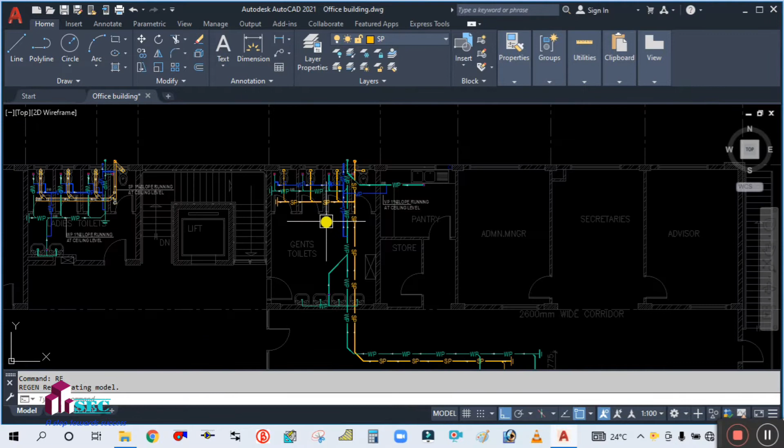Let's continue with our shop drawing for the soil piping. First floor ladies toilet was covered in our previous tutorial, so this is the final one for the gents toilet, first floor.

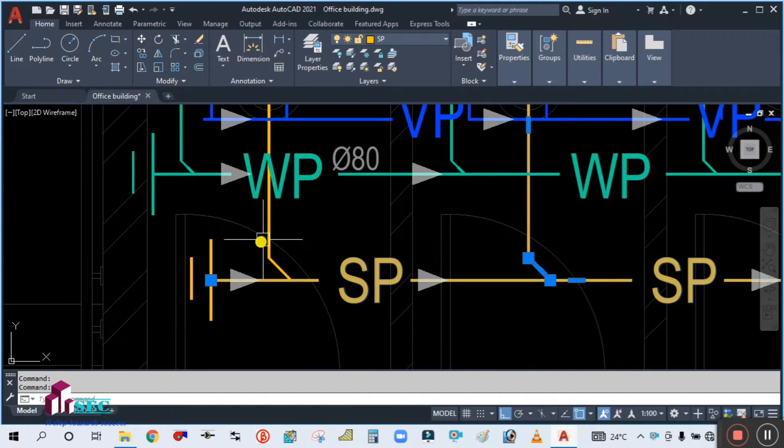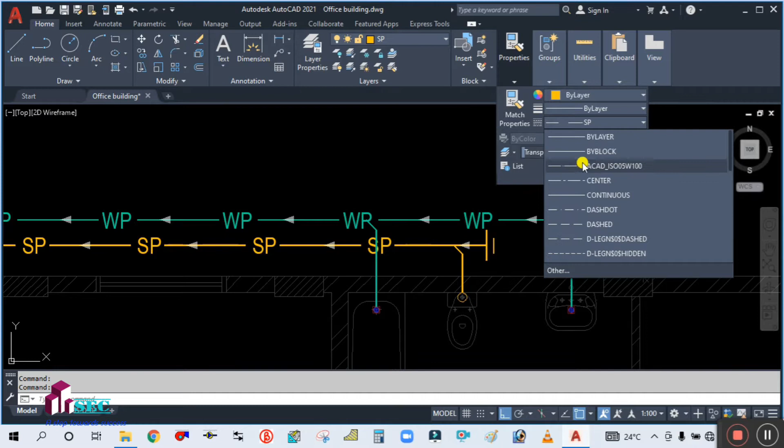Simply select all the polylines, select this one. Now change the line type style first. Go to this property and select line type style to by layer. Now simply select and explode it.

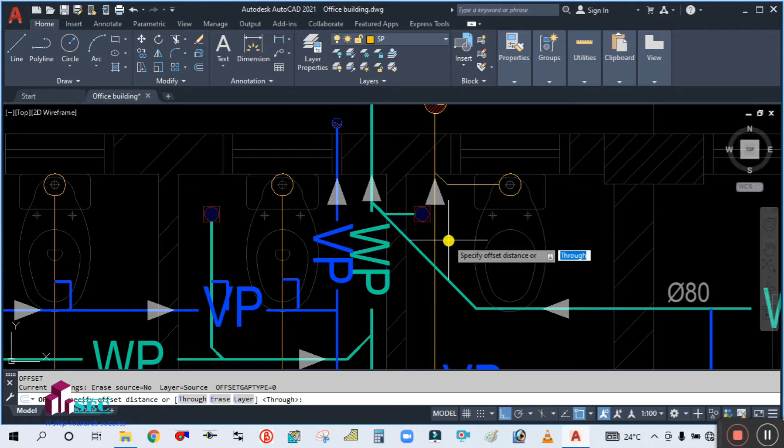Please select and explode. Now simply offset this. The offset is 110 divided by 2. Simply select, press this side, select, press this side.

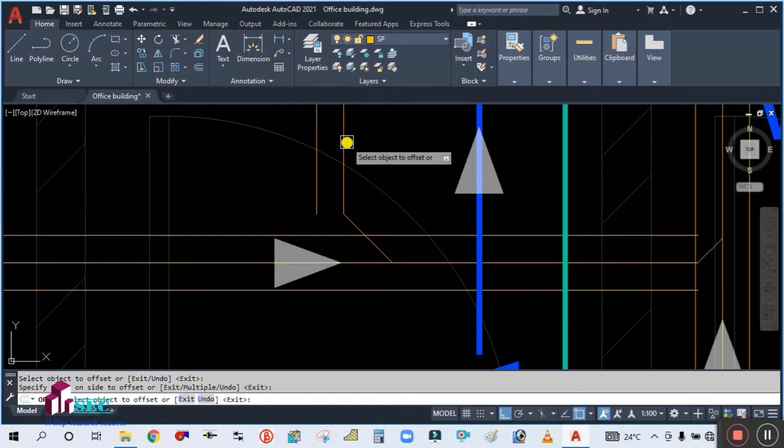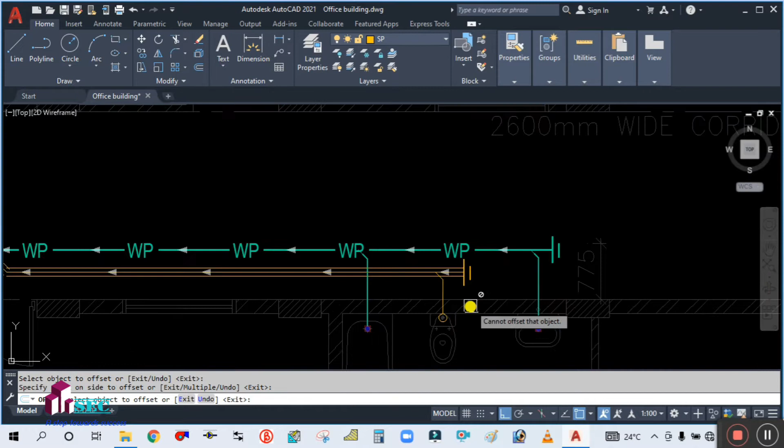Simply offset this one, it's very easy. You need to offset only, after that you have to fix the fitting. So I'm going to offset only, and here can offset like this. Okay, it's over.

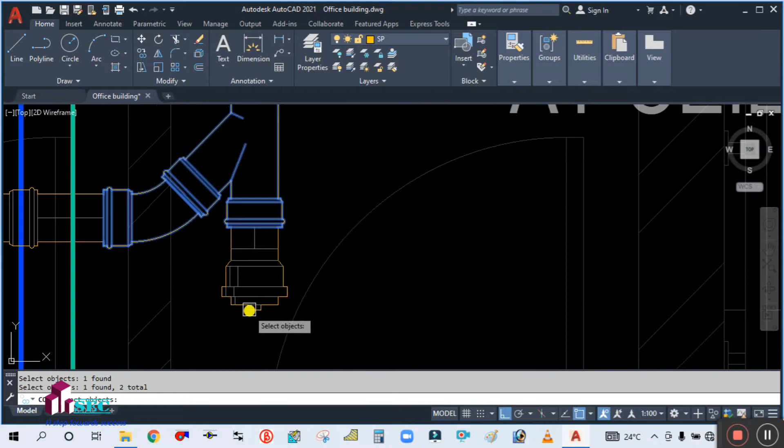Now we are going to copy these fittings. Simply select these fittings from here, select the end cap also, select from the center, and place it here. There you go. Now simply move this one, select this, move from the center.

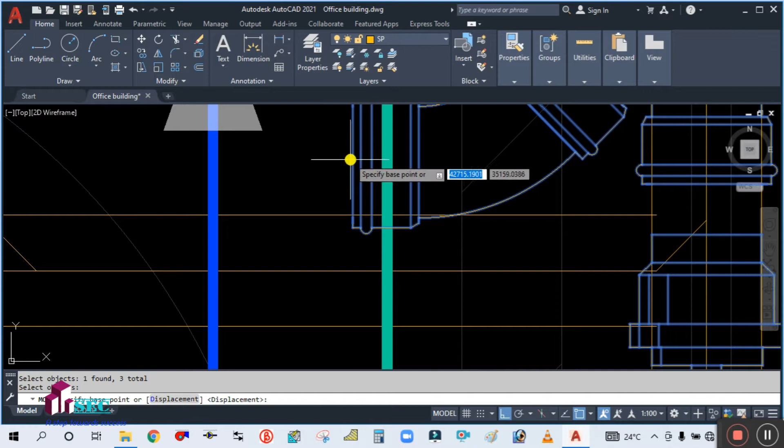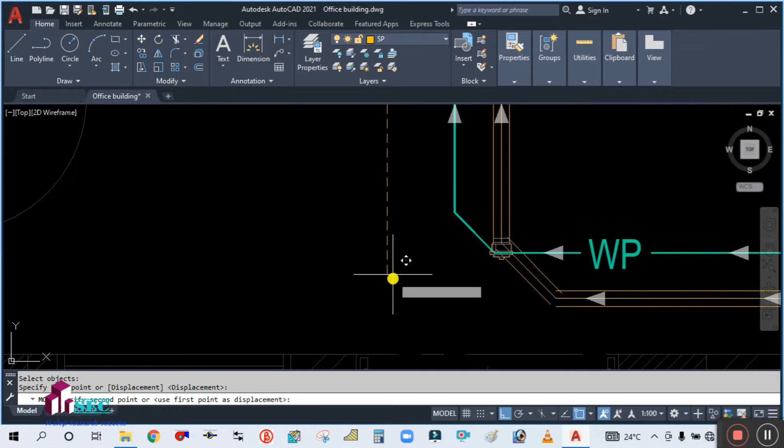Move it down. Now what you will do, this end cap needs to be moved down because this end cap is going to be used here. Now we have to trim the extra line.

So TR, select the edge, cutting edge, then enter, and simply erase this extra line.

Now we have to use the match command. So simply type MA and select this one. Type MA, select the source object and select this destination, just matching this access.

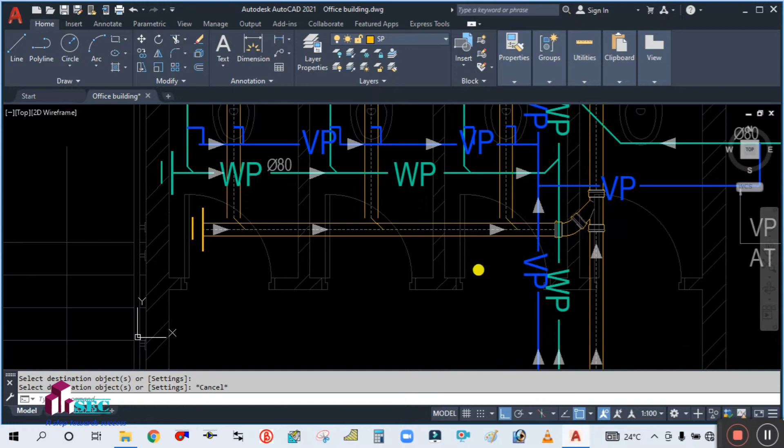Now from here you need to copy this one. Simply copy these fittings, copy from the center line, and paste it here. There you go.

Now simply move this one down. These two fittings need to be moved. Simply select this point, center of this branch, and move it down.

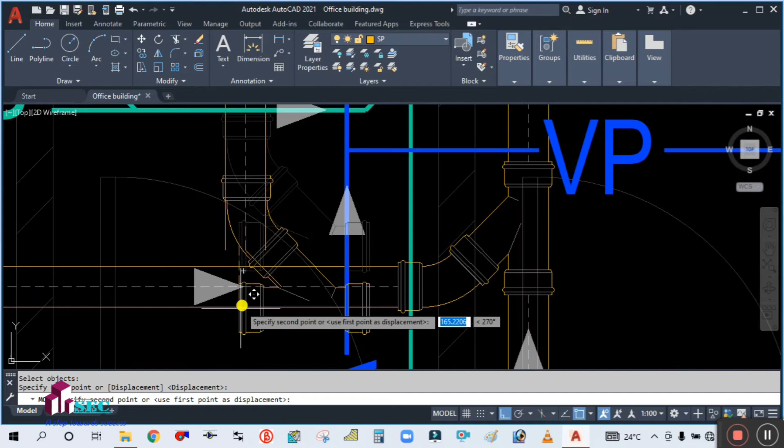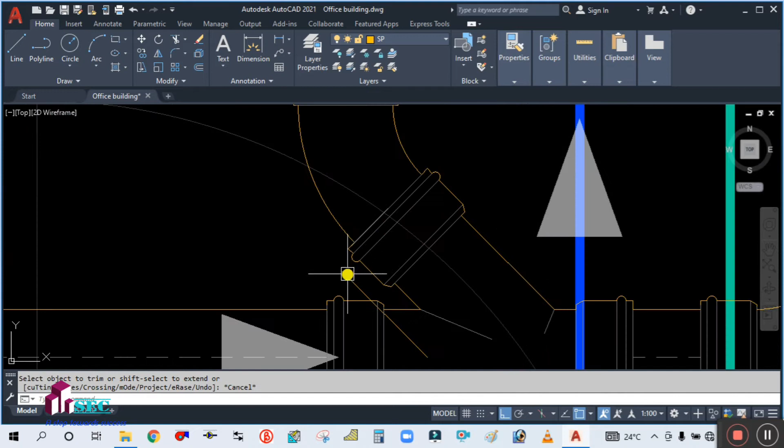Very good. Now TR, simply trim the extra line. So TR, cutting edge, this cutting edge and this cutting edge. Trim this one and trim this one. Simply select this extra line and it needs to be erased. There you go.

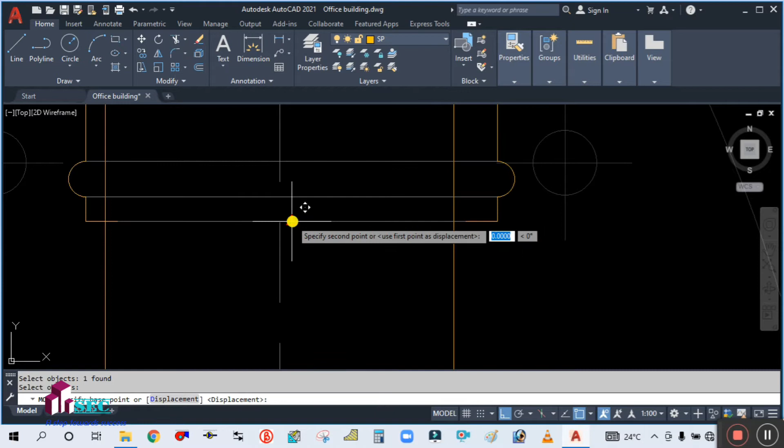Now what you will do, you need to move this little bit to this side because it's not perfectly at center. So move this one. Now trim the extra line, so TR, enter, and erase.

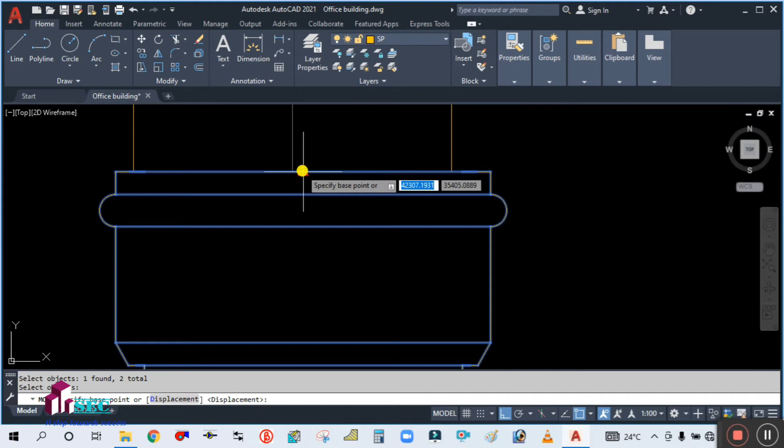So these also need to be moved a little bit, so simply select this one and move from here to here. There you go. Now simply extend this, it needs to be extended, and also this one needs to be extended. Now TR, double enter, trim the extra line.

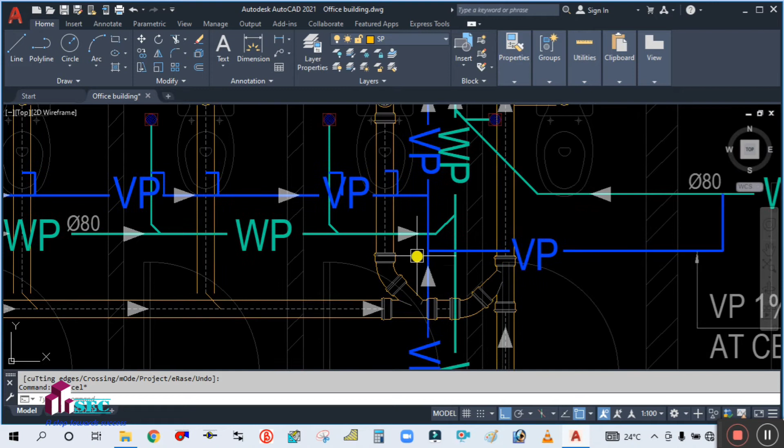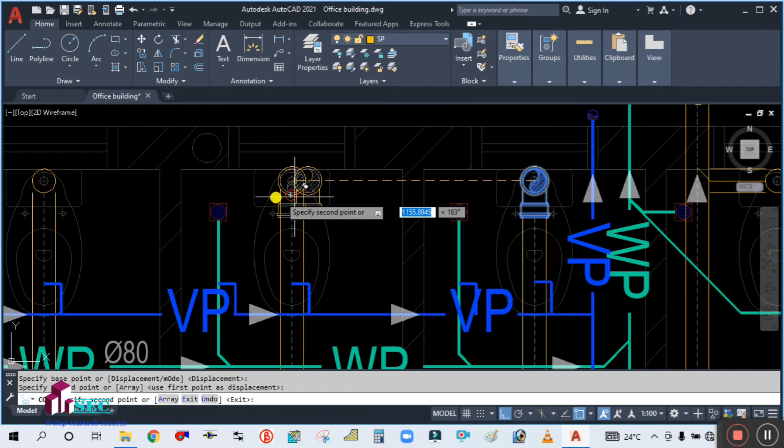Very good. Now what we will do, simply copy this one. This one is already fixed, so this time you need to copy only. I'm going to copy from here, this center line, and simply place it here. There you go, simply place it here to each branch. It's going to be placed.

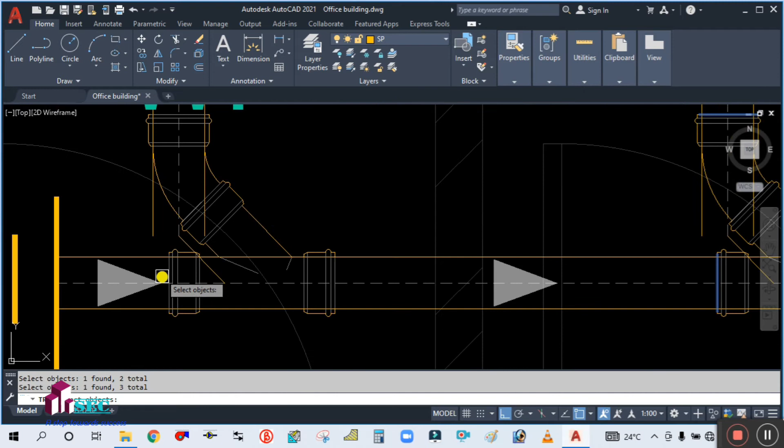There you go. Now simply trim this, select the cutting edge. This is the cutting edge. Please select the cutting edge and trim the extra line. This one is going to be trimmed, this also needs to be trimmed, also this one needs to be trimmed. Now simply select the extra line and erase it, type E, enter.

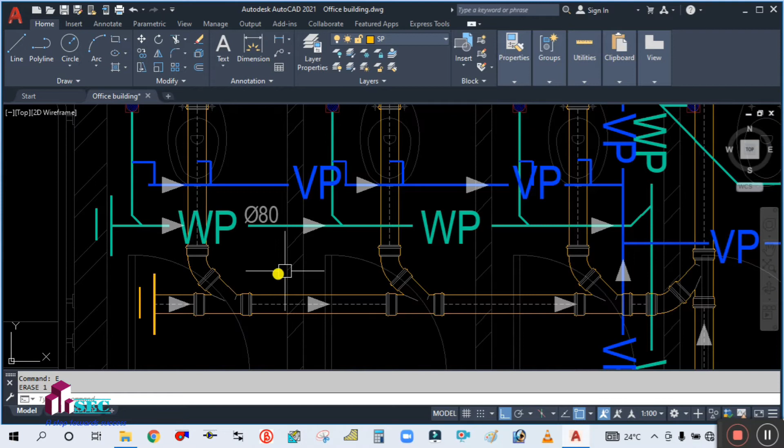There you go. This is very simple and you can do it very fast, quickly, because see how simple it is, only simply copy and paste. One needs to be placed the first time only, and the remaining you just copy paste only.

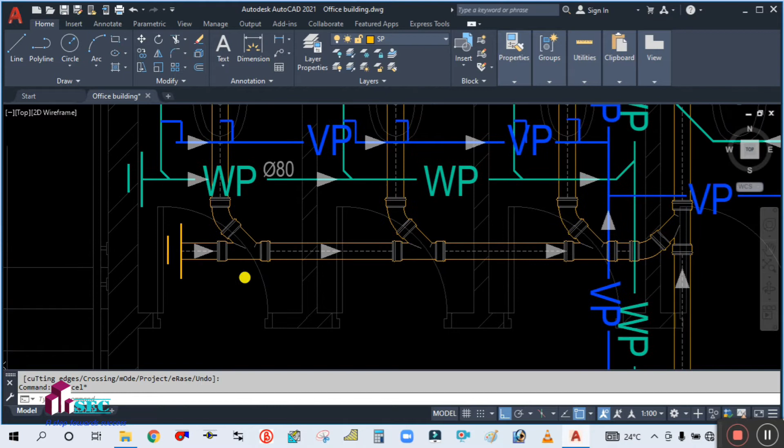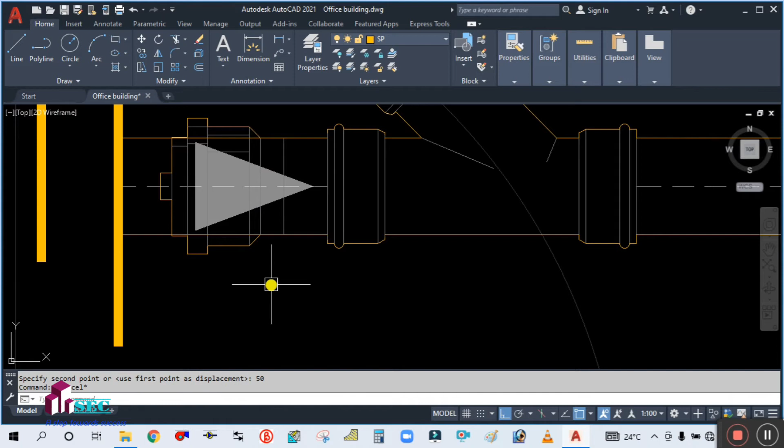So your end cap needs to be copied from here, and simply place it here. Now move this to 50 mm, simply press the 50. Now erase this, now simply trim the extra line. So from this side it's going to be over.

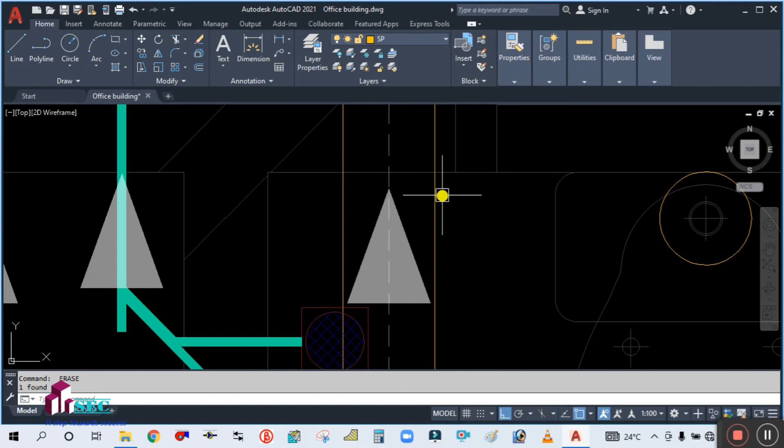Now what you will do, we are going to copy this one, simply erase this, and simply extend this first. Simply extend this one.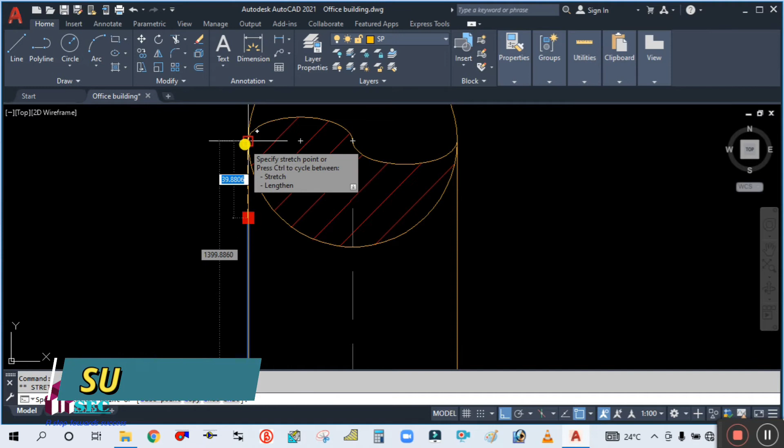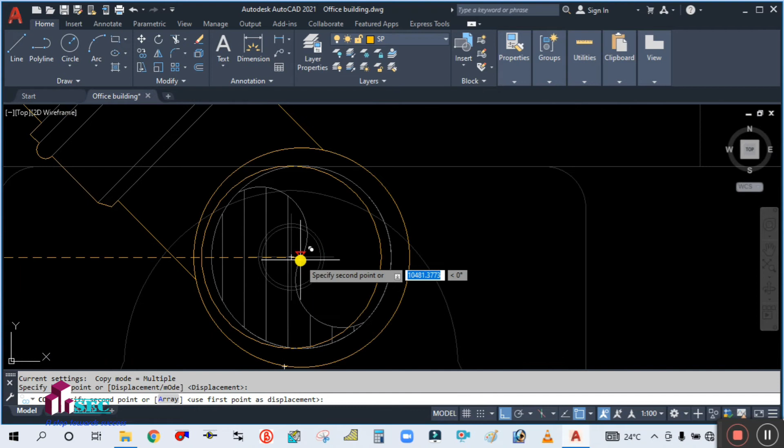Okay, now what you will do is simply copy this from here. Copy it from the center point, and place it here. There you go. Okay, and this needs to be extended.

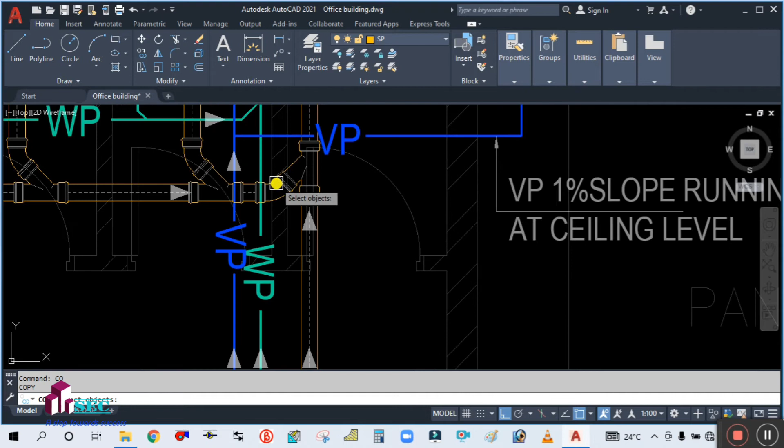There you go. Okay, so this side is already finished. Now we are going to move this side. So what you do is simply copy this Y branch, also this one, and move it down.

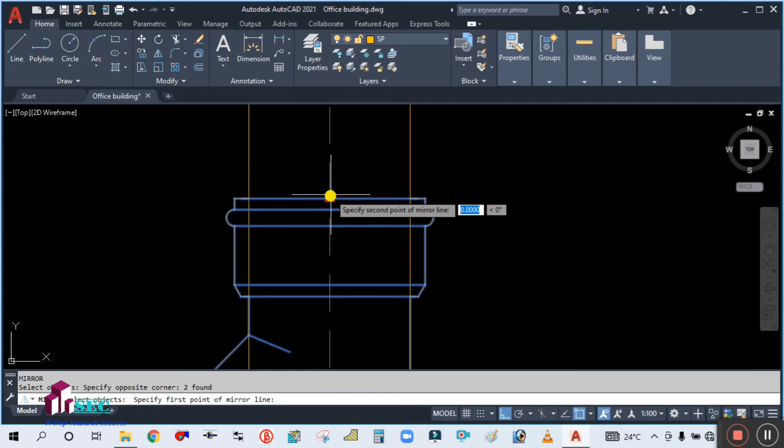Now what you will do is simply mirror this one, so type MI, use the mirror command, enter first point then second point. Okay, and erase the source object, so press yes.

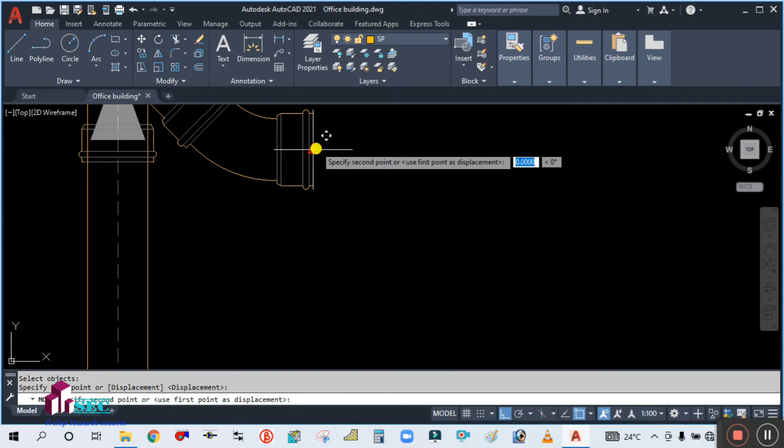Okay, now you need to move this fitting down. So to move this one, simply select the center line, center point, and move it down.

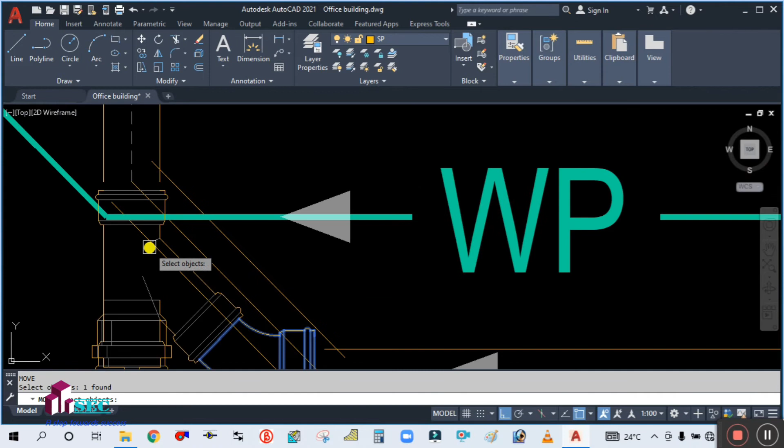You need to extend this line a little bit. Okay, now again you need to select this one, and then you need to move it down. There you go.

Now this end cap, where is the end cap? Here. Okay, you need to move this also, move it and place it here.

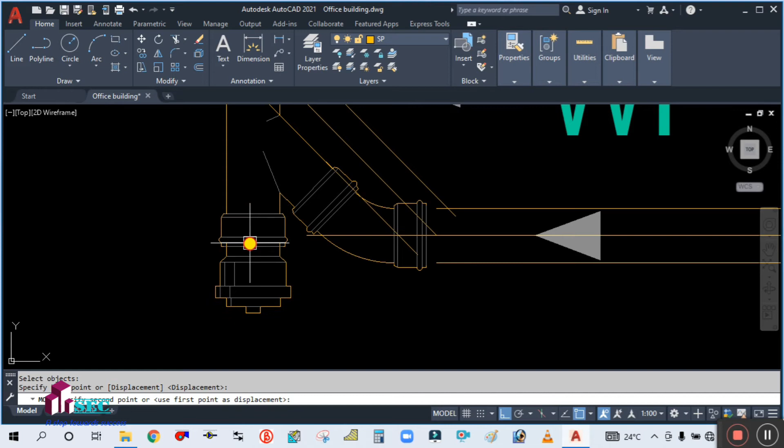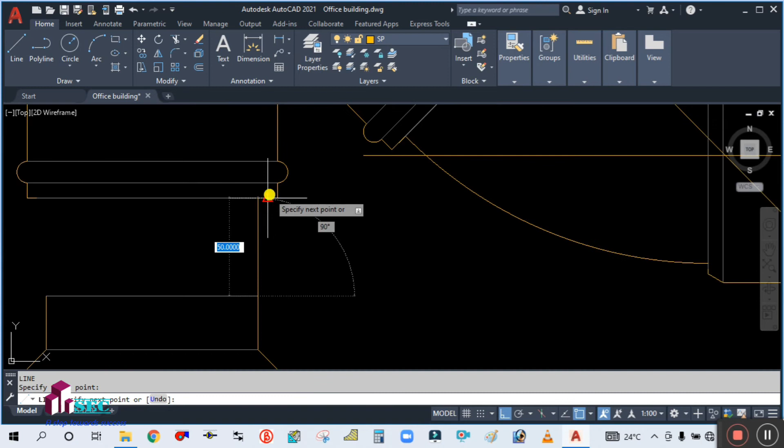Place it here. Okay, now again move this one at a distance of 50 mm. Take one line from here to here, again one line from here to here. There you go.

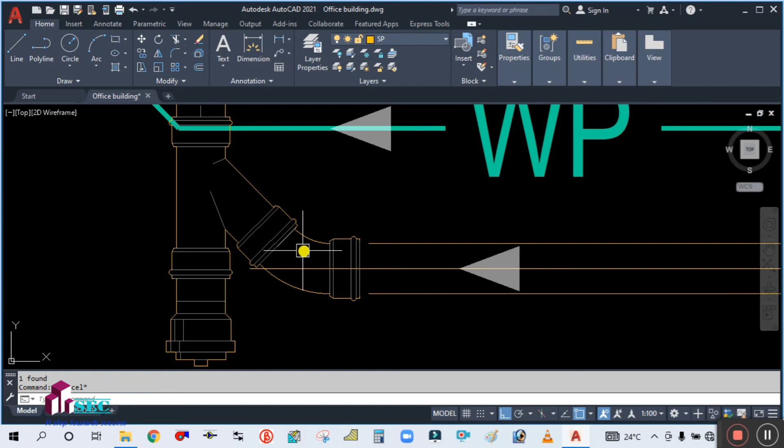Now what you will do is simply extend this one because this needs to be extended, and simply erase this to be erased. Okay, also this line to be extended, so it's going to be extended.

Okay, now use the trim command. So TR, select the cutting edge, this one to be trimmed. Okay, so this is over.

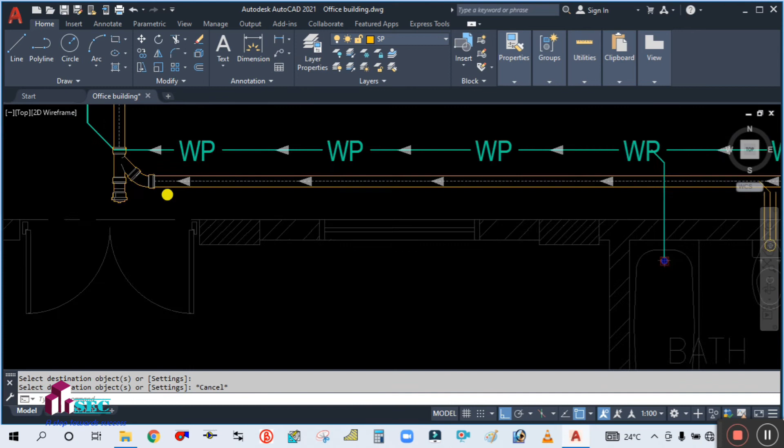Now you have to use the match command again to show the axis of this pipe. Okay, and you need to copy this fittings also here, from here.

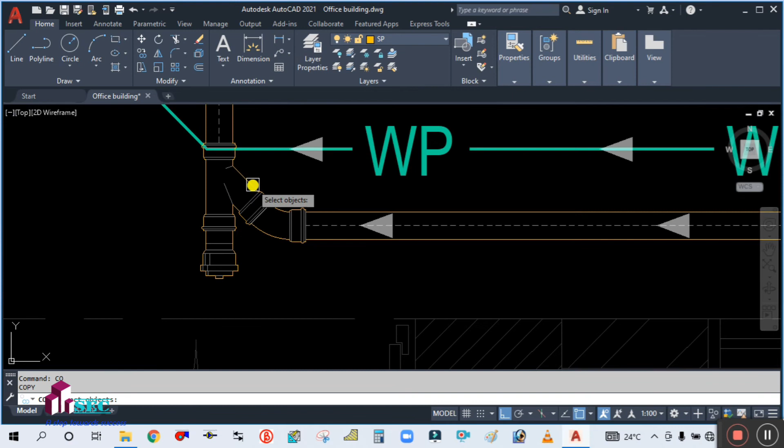Okay, and this also end cap needs to be copied.

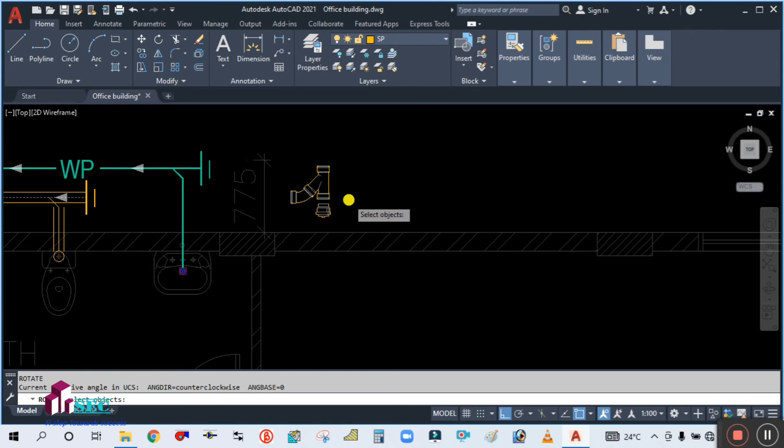Now you have to mirror this. So what you will do is simply select this one, first point, second point. erase the source object, and then you have to rotate this. This one needs to be selected and rotated.

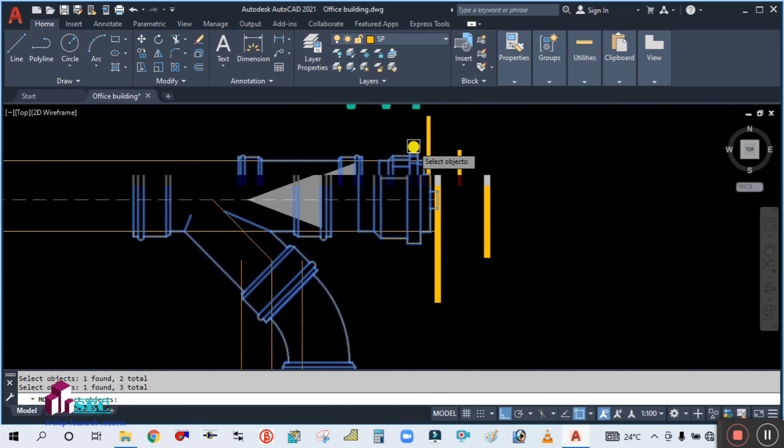Okay, so what you will do is simply move this one, select this point, and it needs to be placed here. There you go. Okay, now again you have to move this one. It's very simple. Okay, move, and now you have to select this point and place it here.

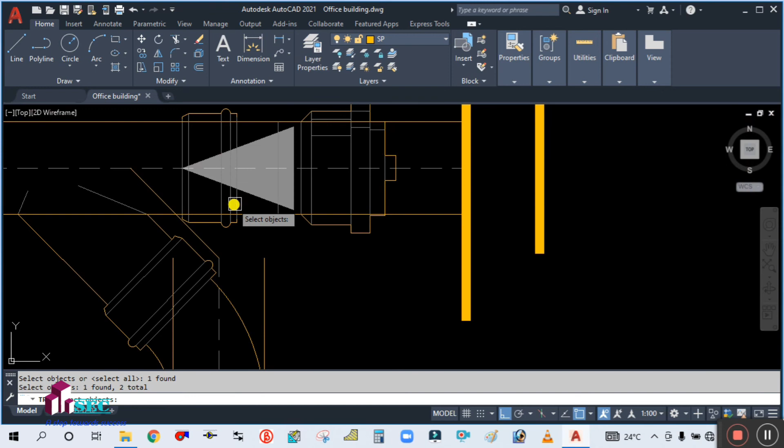Okay, now use the match command and match this. Okay, now TR, select the cutting edge.

Simply erase this. Okay, and also this one needs to be erased. Now use TR, erase this. It's over.

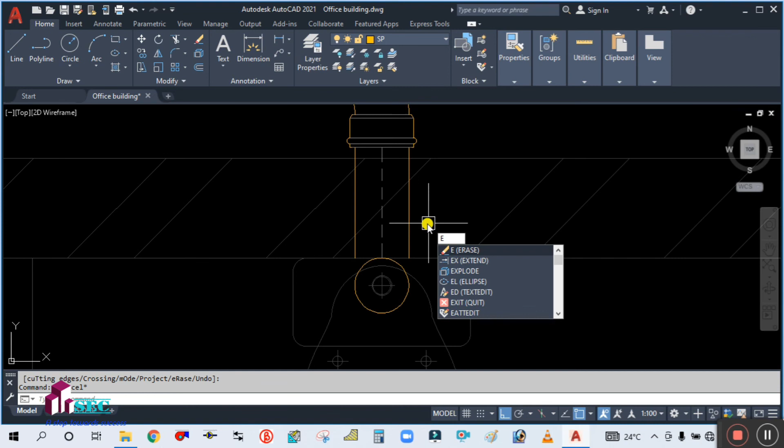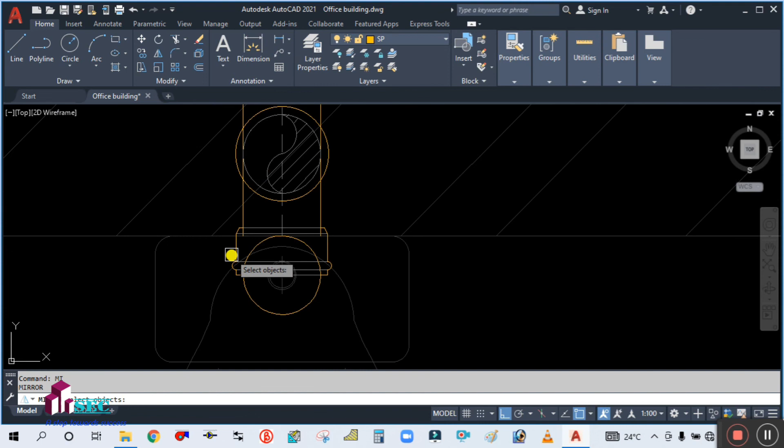Now what you will do is for this one you need to select this fittings, and copy from here and place it here. Okay, now you need to mirror this one, so simply type MI, first point, then second point, erase the source object.

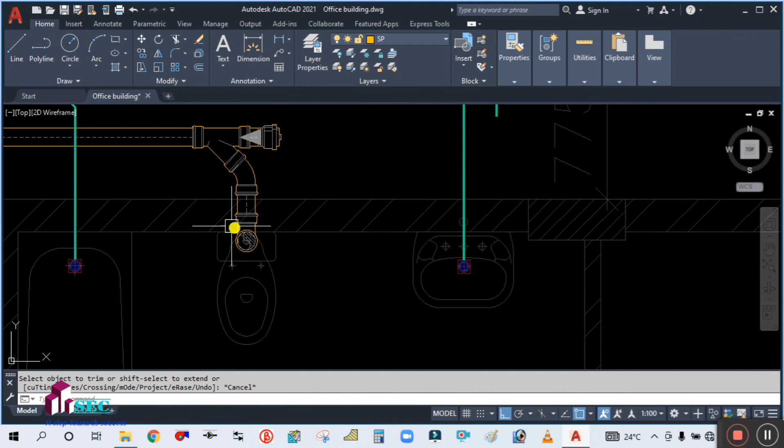Okay, now again move, this is the center point, and place it here. Okay, now use the trim command. So TR, enter, select the cutting edge and trim it. Okay, so it's over. Now simply save this.

So this is the end of your soil piping shop drawing. I think you guys learned how to draw the shop drawing, because I have made 2-3 tutorials for the soil piping. Now next we have to do the waste piping shop drawing. I think you guys will learn how to draw it.